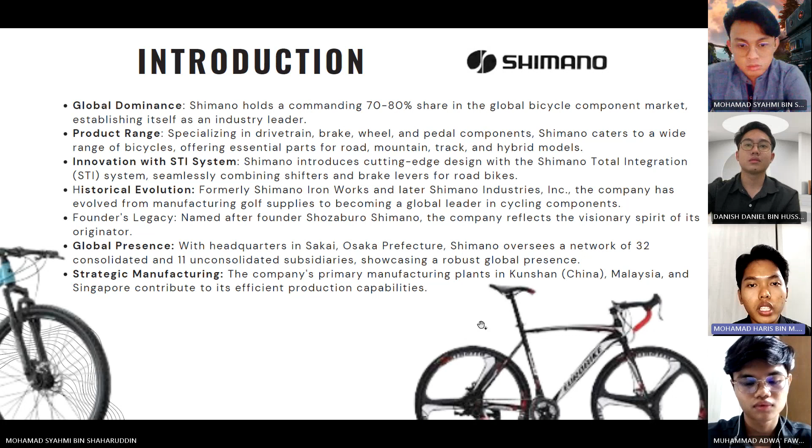Founder's legacy: named after founder Shozaburo Shimano, the company reflects the visionary spirit of its originator. Dan seterusnya adalah global reach, with headquarters in Sakai, Osaka Prefecture. Shimano oversees a network of 32 consolidated and 11 unconsolidated subsidiaries, showcasing a robust global presence. And last is strategic manufacturing: the company's primary manufacturing plants in Kunshan, China, Malaysia, and Singapore contribute to its efficient production capabilities.

So next slide is about the problem statement. Shimano have had some issues with their high end crankset in recent times. It seems as though the Ultegra and Dura-Ace cranksets are the primary units affected. And next is about the naming system used by Shimano for both their bottom bracket and crankset, which causes some confusion.

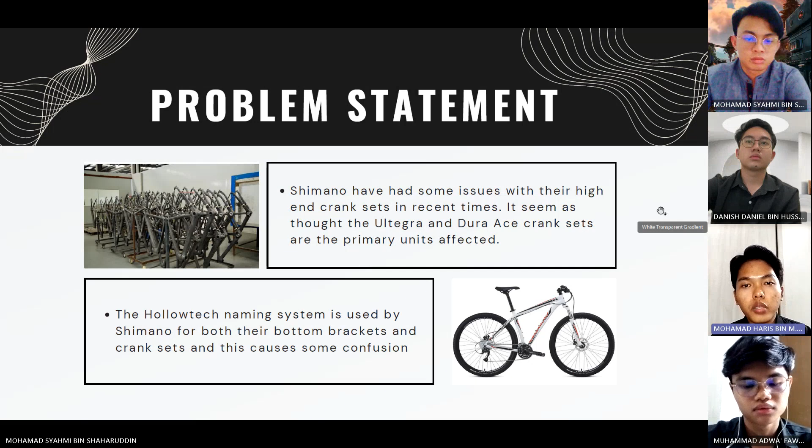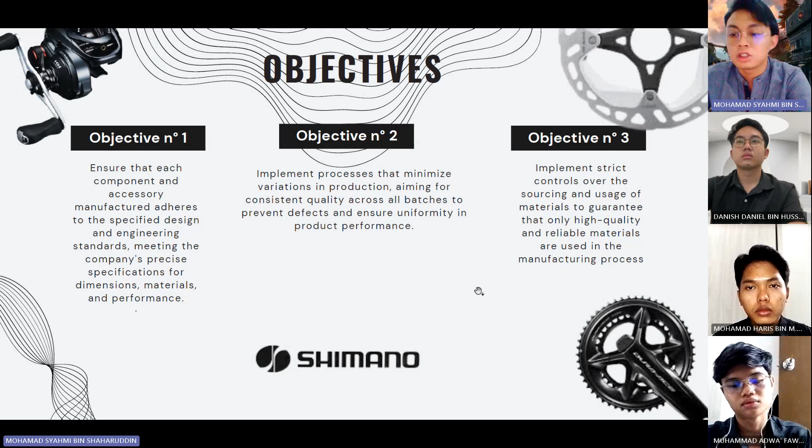First objective is to ensure that each component and accessory manufactured adheres to the specified design and engineering standards, meeting the company's precise specifications for dimension, material, and performance. Second objective is to implement processes that minimize variation in production, aiming for consistent quality across all batches to prevent defects and ensure uniformity in product performance. Third objective, implement strict control over the sourcing and usage of materials to guarantee that only high quality and reliable materials are used in the manufacturing process.

Untuk slide seterusnya ialah justification for the appropriateness of the tool. The best quality control tool we have been using here is the cause and effect diagram. This diagram visually organizes potential causes for a specific problem or effect by displaying them in detail alongside theories. It is commonly known as a fishbone or Ishikawa diagram. When determining the cause of a problem, the cause-effect diagram aids in organizing different theories about the root cause and presents them visually. The cause and effect diagram for the article can be found at the bottom.

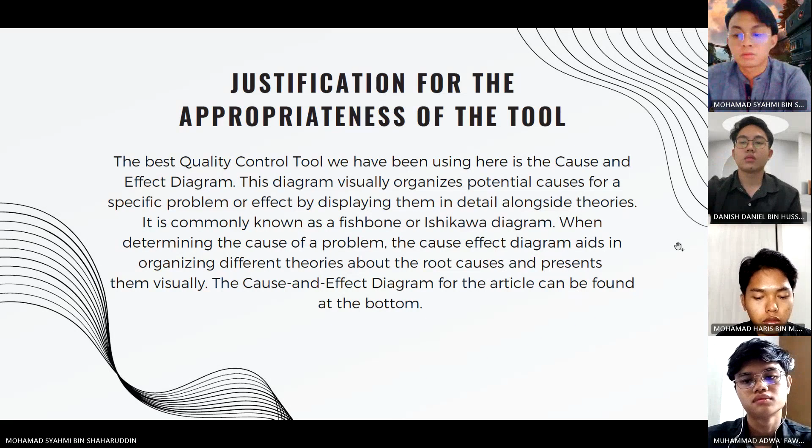Firstly, the confidential quality control method. Shimano employs confidential quality control tools and methods to uphold the renowned standards of its cycling components and accessories. Number 2 is probable tools and techniques. It is likely that the company utilizes statistical process control (SPC), quality control charts, and failure mode and effect analysis (FMEA) to monitor and analyze the manufacturing process, ensuring it stays within set control limits and identifying potential failure modes.

Next is Six Sigma principles. Six Sigma principles are probably implemented to systematically reduce defects and variation in the manufacturing process, contributing to heightened product quality. Next is root cause analysis. The application of root cause analysis techniques is crucial for identifying and addressing the underlying cause of any issue that may arise during manufacturing. The last one is control plans for precision. Meticulously crafted control plans are established to define procedures for maintaining quality at crucial control points during production, emphasizing precision and adherence to set standards.

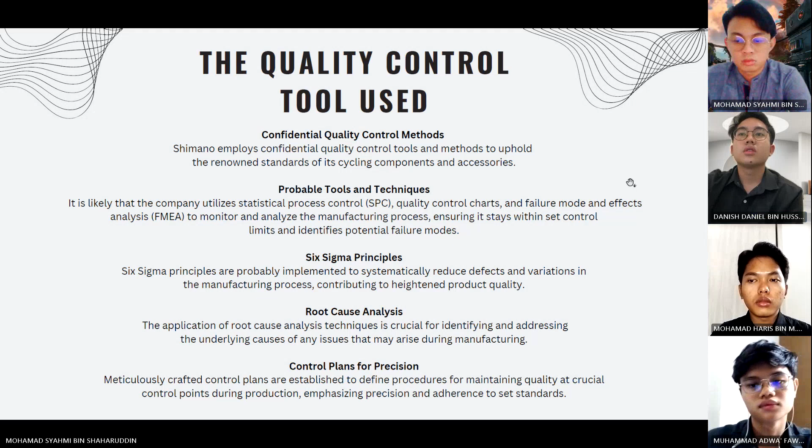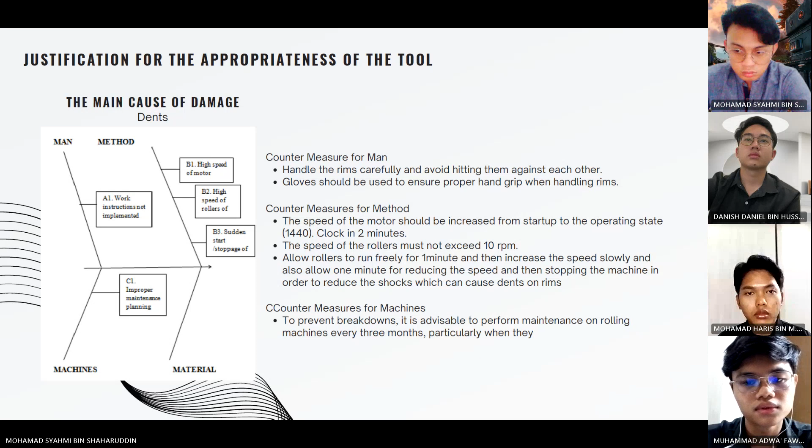Next, for result and analysis, table 4 shows the detail of rejection of 26 inch rims. Next is the flowchart for the manufacturing of rims at Shimano factory.

First, start. Second, incoming material inspection. Cutting and forming inspection. Next, machining quality check. Heat treatment inspection. Surface finish examination.

Assembly inspection. Intermediate quality check. Final inspection. Performance testing. Packaging quality check. Documentation and traceability. And last, end.

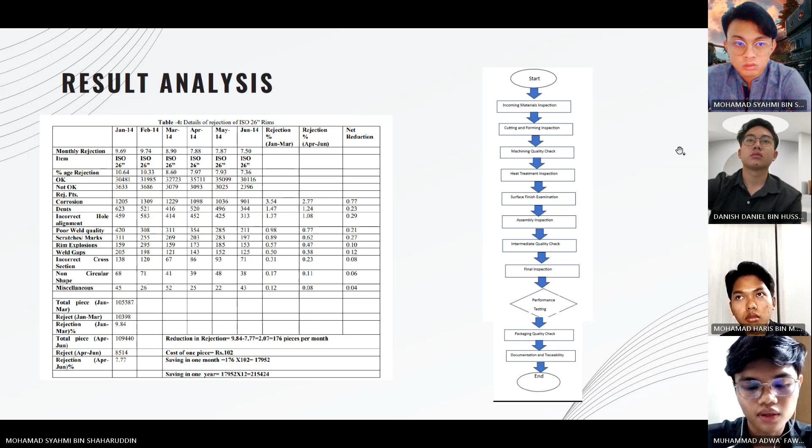Next, for the conclusion, quality leads to an improvement in productivity and also leads to customer satisfaction. A study was conducted to determine the role of quality control tools in the bicycle rim manufacturing industry.

These tools can be widely applied with success in the quality management system. Despite their simplicity and ease of interpretation, quality tools are not as widely used as expected. The main goal of the study is to reduce the cost per component by reducing the monthly rejection rate.

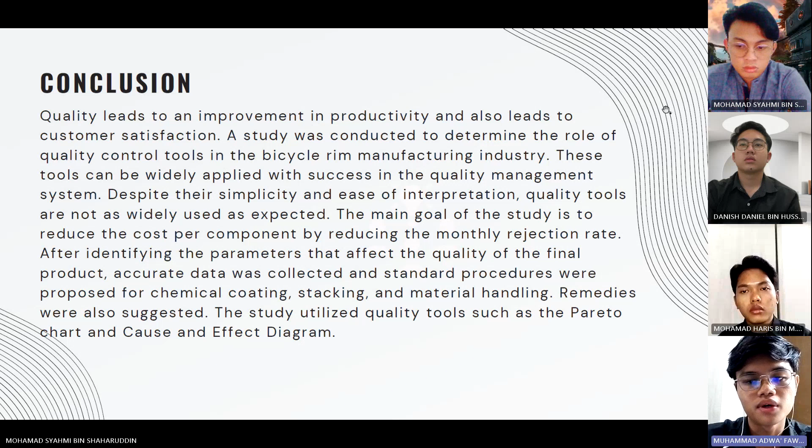After identifying the parameters that affect the quality of the final product, accurate data was collected and standard procedures were proposed for chemical coating, stacking, and material handling. Remedies were also suggested. The study utilized quality tools such as the Pareto chart and cause and effect diagram.